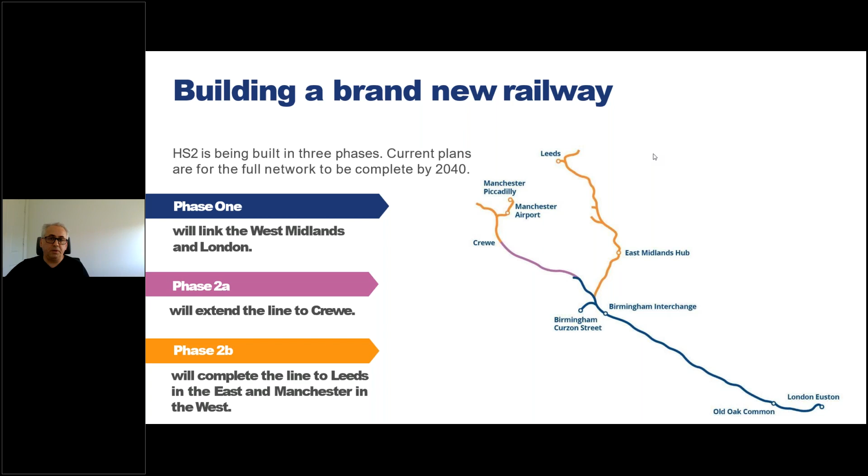So how is HS2 structured and how are we going to build it, basically? We have phase 1, which is from London Euston to Birmingham, the section which is currently undergoing civil works already, and we will go there in a minute. Then there is phase 2A, which will extend the line from Birmingham to Crewe, and phase 2B, which will complete the lines to Manchester and to Leeds on the east leg. The works are planned to be completed by 2040.

So what's the HS2 mission? We are trying to bring more capacity in terms of having more trains running, and reducing carbon. What does that mean? Bringing the traffic from our roads to the railway, and also making better connectivity between the south and the north.

A little bit about the work in progress. As I said already, we have civil contractors with boots on the ground doing works. We have a joint venture, BBV, which is Balfour Beatty and Vinci. Then we have EKFB doing works around Buckinghamshire, and we have Align doing works on the outskirts of London, things like the Chiltern Tunnel and the Colne Viaduct, which will be the longest viaduct in the UK. And we have SCS Railway, who are delivering Euston and Old Oak Common.

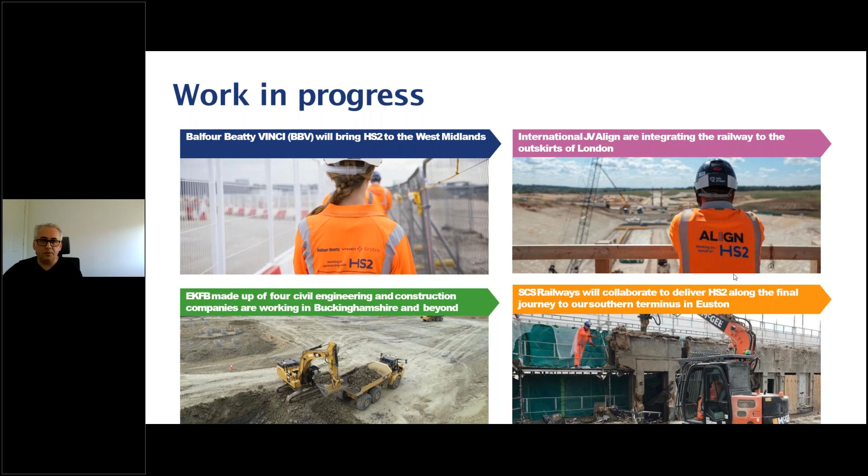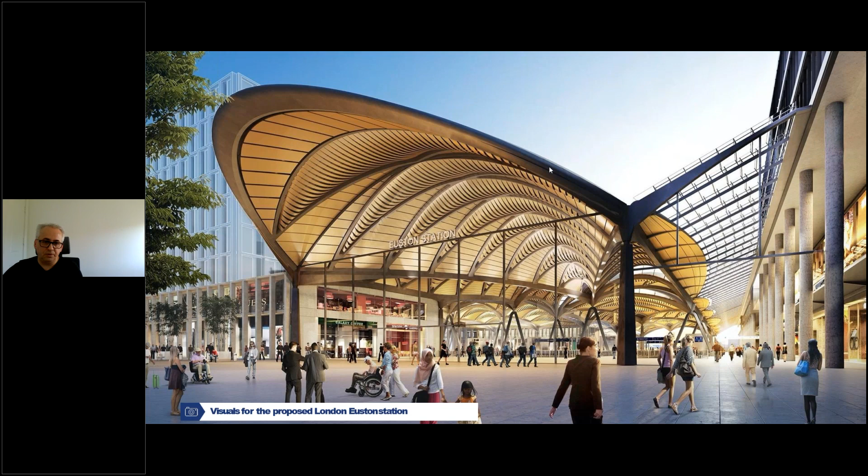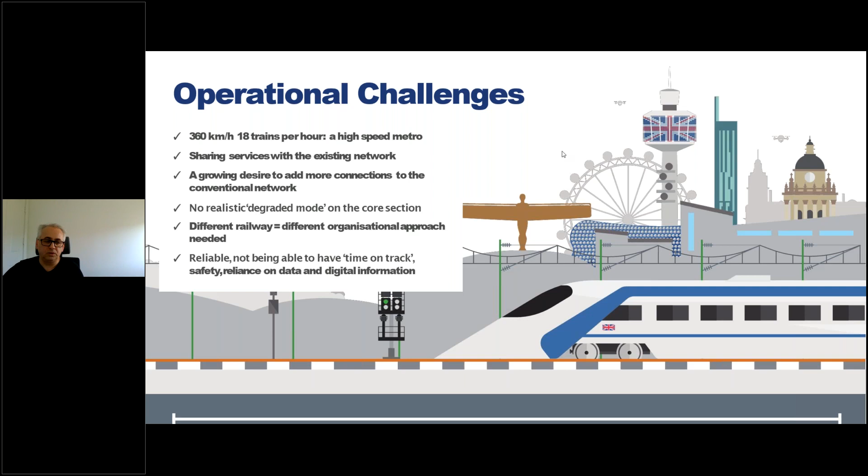What's the operational challenge? The operational speed is 360 kilometers per hour, and the plan is to have 18 trains per hour. So that sounds like a high-speed metro. It's really challenging to have a railway which is going to be reliable, available, maintainable and so on. And also, as I mentioned before, having the trains capable not only to run on the HS2 infrastructure but also on the existing infrastructure is going to be a real challenge as well.

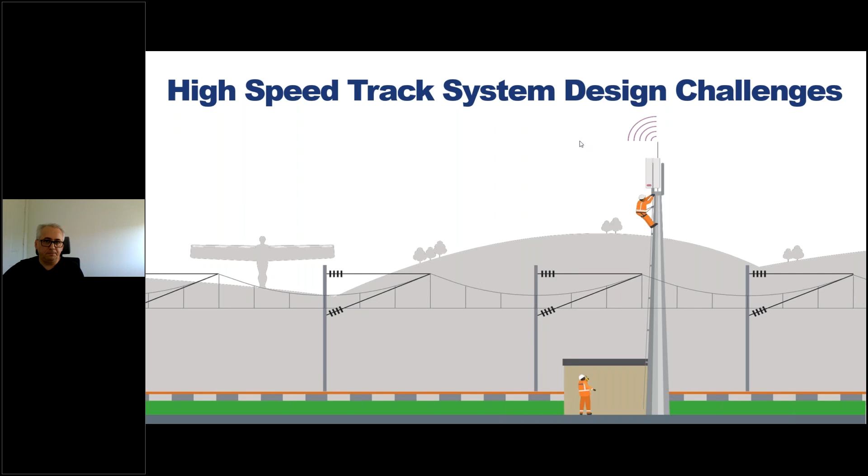So that's a little bit about the project itself. I'm going to discuss a little bit about the challenges which we in the track department are facing, how we arrived at some of the conclusions, and some of the options we considered. Obviously, at the beginning of the project we considered ballast versus slab track, and some of the main considerations when you look at the track system are listed here: cost, service life expectancy, maintenance, passenger comfort, and safety.

Safety, I'd say, is paramount, and because of the speed, the accuracy you have in your installation is paramount. So we did explore all of this, and somebody will tell me, well, slab track is obviously more expensive than ballast, which is fair enough. But slab track is not something which is very popular in Britain, I should say. So we had lots of challenges from different departments of the DfT to prove why slab track is going to be better than ballast.

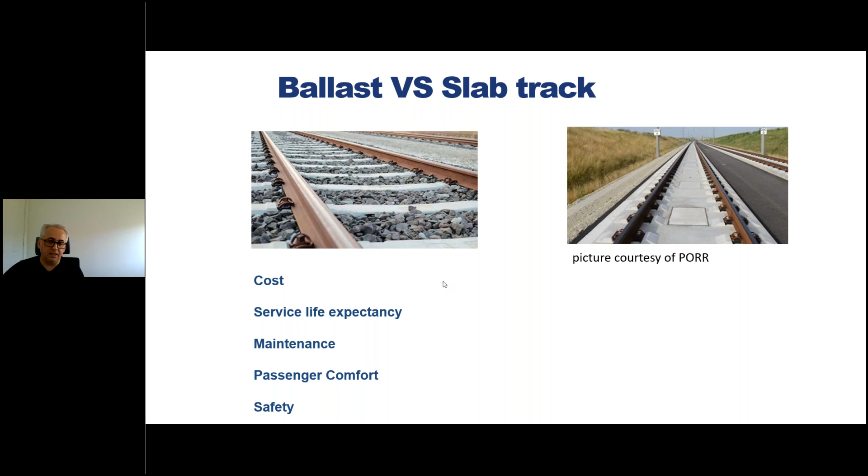Okay, so we chose the slab track, and we already have PORR, which is a little bit of an unusual contract for them. I don't know if you know, but PORR is a track slab contractor, and they are experienced on high-speed track and on metro; they are an Austrian company.

But in our contract, they will deliver only the precast slab, so the top slab. They have to design, manufacture and supply those precast slabs, and this is going to happen in the UK. They will have a factory in Somerset, close to a quarry, to tackle all the environmental issues and carbon reduction as well.

So PORR has been working closely with us for a year now, trying to develop the track system design per se, having the challenge to have different types of slab, as you can imagine, because in some areas, especially some residential areas, we will need a different slab to deal with noise and vibration.

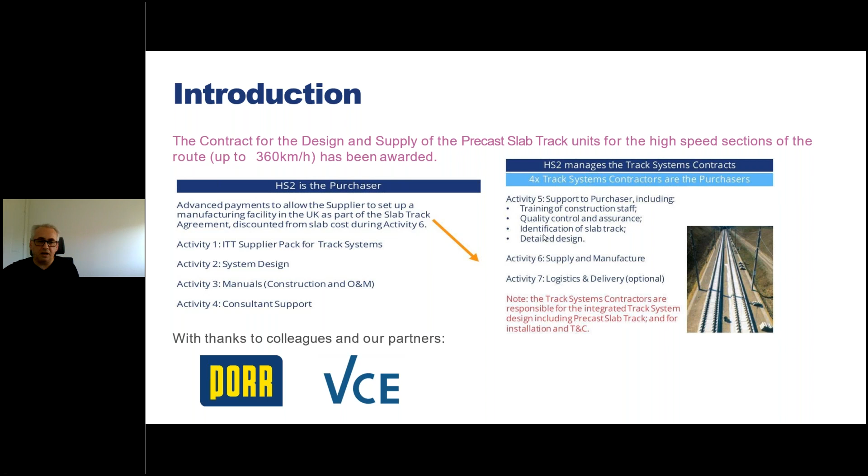I'm calling it a resilient slab, and in some areas we will have an enhanced resilient slab, I should say, which was quite challenging for us, introducing a little bit more of a floating slab track. So it might be the solution in some areas where, let's say, we have a residential building on top of tunnels, or even care homes and so on and so forth.

So looking at the trackwork packages, trackwork is part of the railway system. How we split it is track north, which is Birmingham and down. Then central, and urban, which is London basically and the outskirts of London. And then we have the track package for Phase 2A, but Phase 2A is not so advanced. The civil work didn't start yet.

So these three track packages, north, central and urban, hopefully will have a contractor by the end of this year in December. Other packages, as I mentioned before, the precast slab track. This is the PORR contract, working with us for a little bit more than a year now. Then we will have a contract for rail, which is CEN60 rail. We are negotiating as well. And another contract would be the switch and crossing contract.

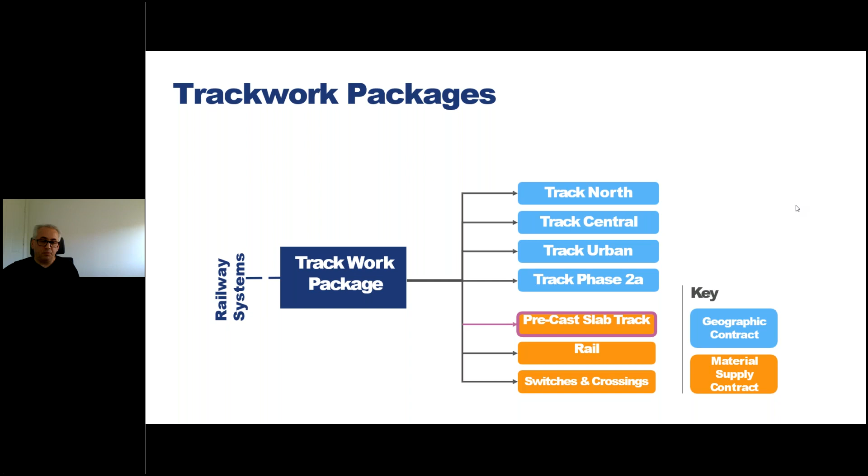That's interesting, because we are having lots of challenges with choosing the geometry, because of the civil footprint, as you can imagine. So these are the contracts. A little bit about contract quantities now. As I mentioned, these are the Phase One contracts which are now live. So we have the route, as I said, which is Phase One.

You can have a look here at the amount of work we need to deliver only in Phase One: 80 kilometers of embankment, and cutting, I guess, 60 kilometers, 15 kilometers of viaducts, and so on and so forth. The total tunnels will be 39.4 kilometers. Chiltern alone is 16, and this is standard bored tunnel, and then we have the cut and cover tunnels, which are a little bit shorter, but still 13.4 kilometers.

And then switch and crossing, we have 170 units for Phase One and Phase 2A, and the rail expansion devices, we have 75 units along the route on Phase One and Phase 2A as well.

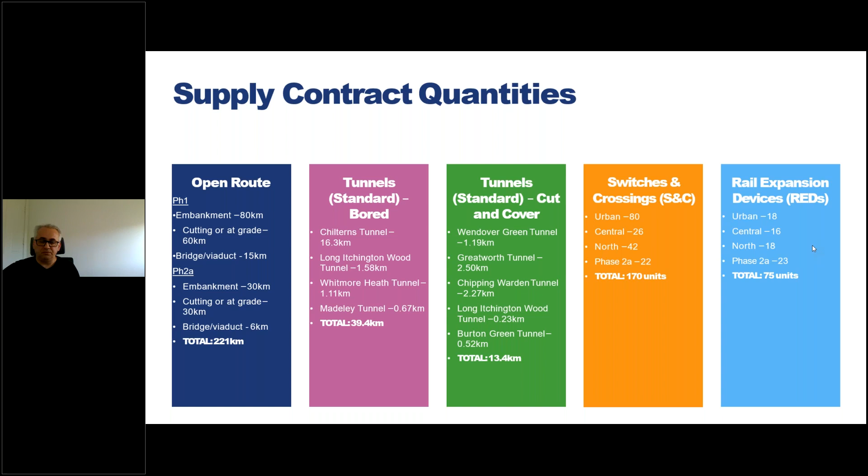One more thing which I wanted to mention: under the S&C we will have different types of slab track, but that's not in the scope of PRE, because, as you can imagine, we have what I call high-speed S&Cs with swing noses, and only for that area HS2 is mandating precast slab track. But the track contractor will choose the precast on his own, because, as I said, it's not included in the PRE scope.

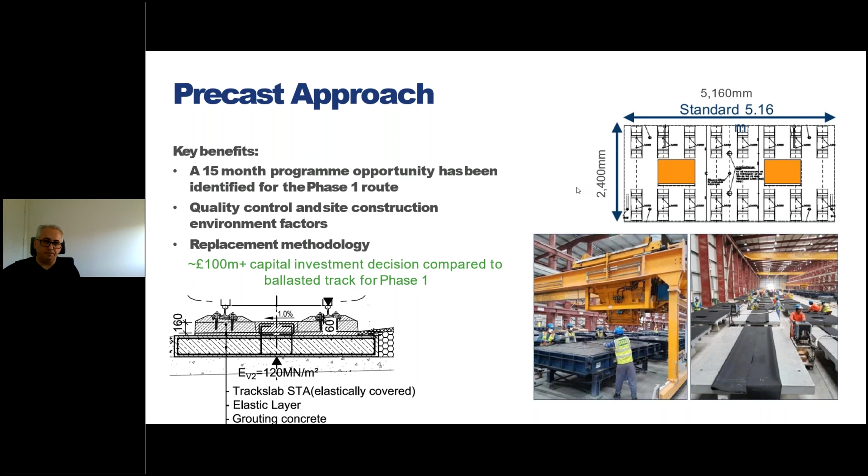And another S&C, what I'm calling conventional S&C for lower speeds, might be cast in situ or other options, or precast. So we are not mandating those, because that's something the track contractor we are expecting to bring in and price for.

So I mentioned briefly, this is how it's going to look like. All the pictures, I have to mention, are courtesy of PORR, so they allow me to use them. As I said, the bottom picture here with the precast is from another job. This job is from Doha, so they have a facility similar to what they are going to build in Somerset, and they are making provision, and they will start to do that later on in the program.

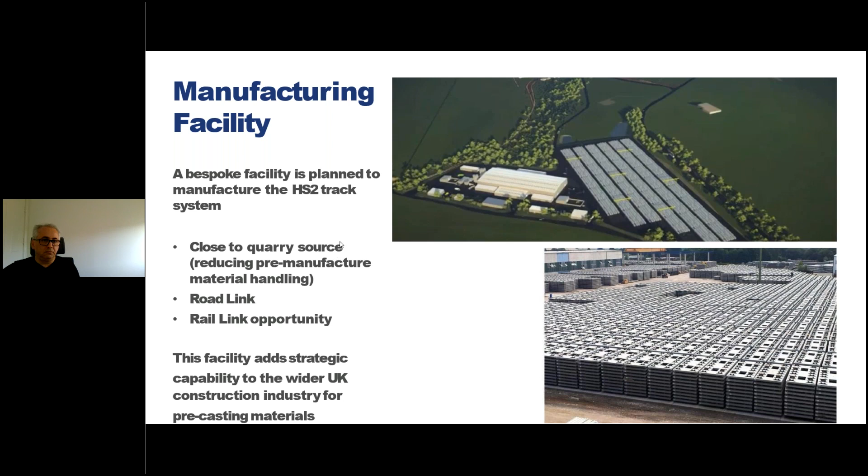But once it's installed, a slab track needs to stay for at least 60 years, with very little maintenance apart from fastening and rail checking and so on. So the slabs are designed and built to last that long. So when you put that in the equation, the cost which you calculate for ballast and slab, you can say it's nearly square.

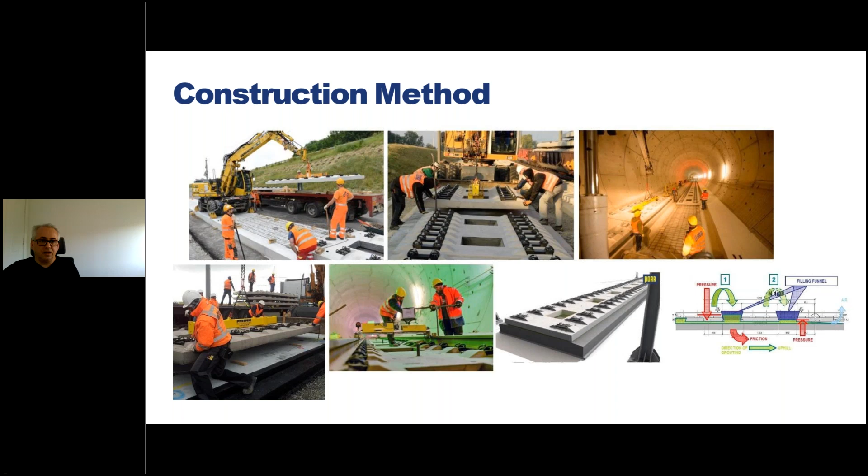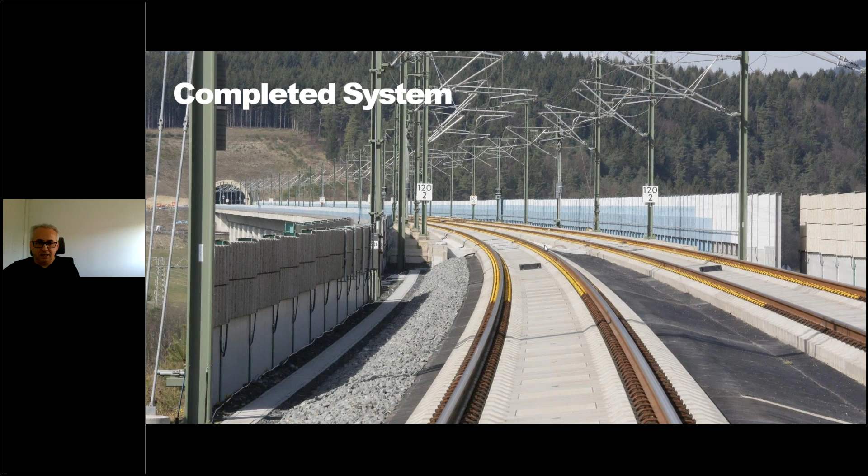This is how a complete system, PRE system, looks like. This is from another project, obviously not in the UK. They didn't do any high speed in the UK. So this is how the final work will look.

Going back to some of the challenges again, track design challenges. So we have track alignment and track quality, very important, as speed and passenger comfort are key. And then earthworks interaction: we have the challenge with settlements, and when you have a slab track you almost have to have settlement-free earthworks. Of course, that's not possible everywhere, but as long as the settlements are uniform and long, it's not an issue. Differential settlements, I should say, are something which is not acceptable, especially for a high-speed railway.

Other challenges, as I mentioned, sound, noise, and vibration, especially ground-borne noise, and I will talk about it later on. And also integration with structures, bridges especially, and also tunnels, because you have an interface with those as well.

Track alignment and track quality: obviously, the tolerances when it's about high speed, it's very important to have almost perfect alignment, I should say, and installation and monitoring of those. It's very important. And again, achieving an alignment which is capable of running a 360 kilometers per hour train, in terms of parameters like rate of change of cant and deficiency and so on, are key elements.

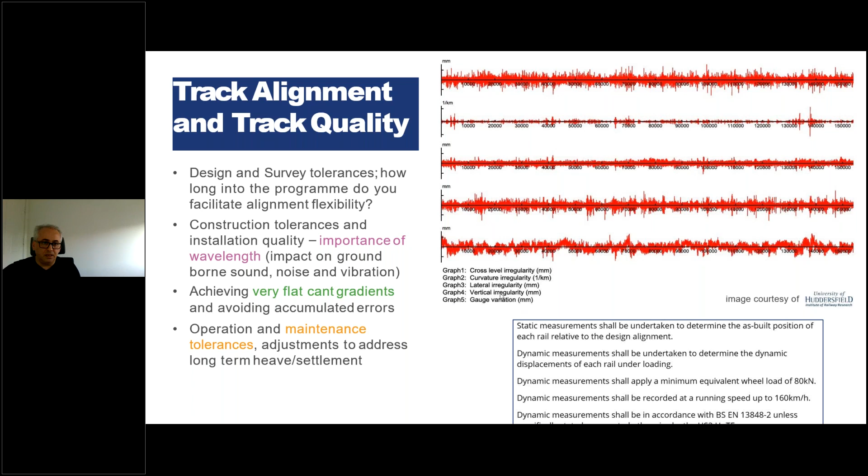So in terms of survey, I mentioned that because HS2 is using what is called snake grid. I think Network Rail has got something similar. The snake grid is a very powerful tool because of the accuracy and the precise integration of the design.

So for example, if you use the normal Ordnance Survey, you will have a 60-meter difference between the snake grid and the Ordnance Survey. So that's quite a lot. So having something like snake grid, which is like measuring a flat surface rather than an arc, was very important for us to have implemented.

And the survey team is part of my team, the track team. So I'm working closely, as you can imagine, with other railway systems to implement the survey requirements as well.

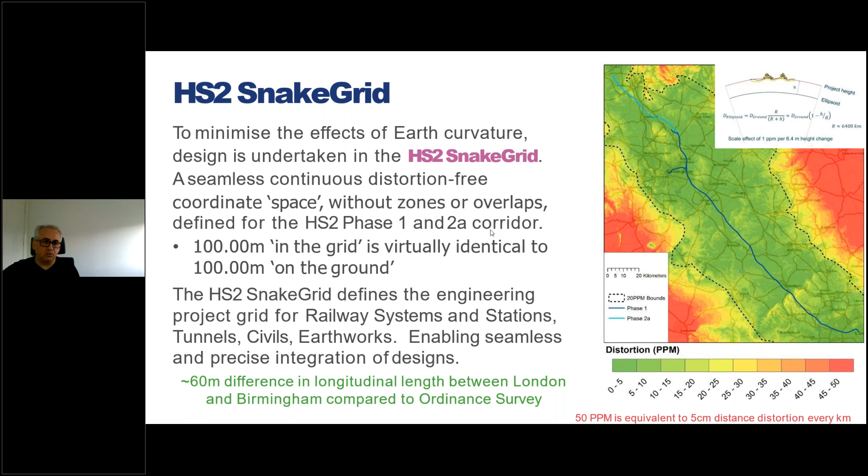Earthwork interaction, as I mentioned before. When you have a slab track installation, it's so critical when you are going to start to install the slab, and what kind of settlements you are going to have, or heights you are going to have there, and so on and so forth. Because once you install the track, if you have a ballast track, well, we can go there and tamp, and we may fix the alignment.

That's not quite the same with the slab track, because we need to make sure at the handover, when the civils hand over, the track is ready to be laid, and also continuously monitor to see if the empirical mathematics are proven, and actually we don't face any issue with the track installation.

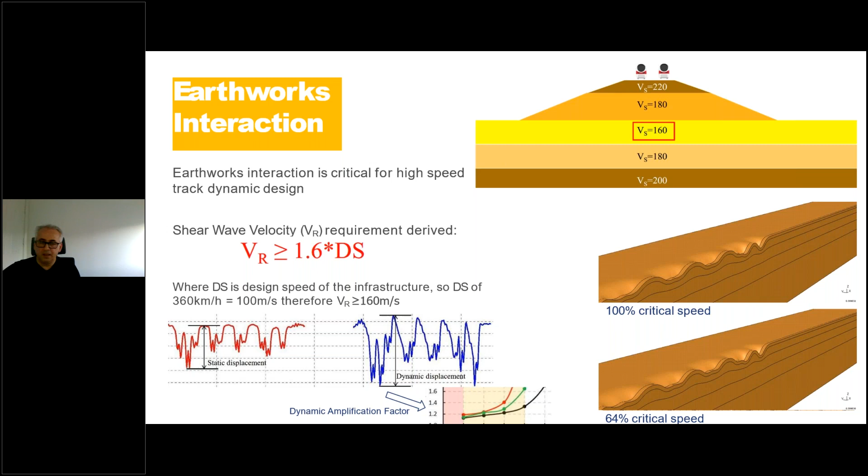On the earthwork interaction, the settlements, as I said, are very, very critical. Normally your earthworks have to be almost settlement free. But in our standards now we allow for a 30 millimeters maximum over the 60 year period, and those settlements should happen continuously on a long stretch of rail, not having differential settlement and so on and so forth.

Because having earthworks which are settlement free will include a lot of piling and extra cost, as you can imagine. So we need to go above and beyond in order to make sure what we are allowing in terms of settlements is manageable in terms of operation and maintenance and so on.

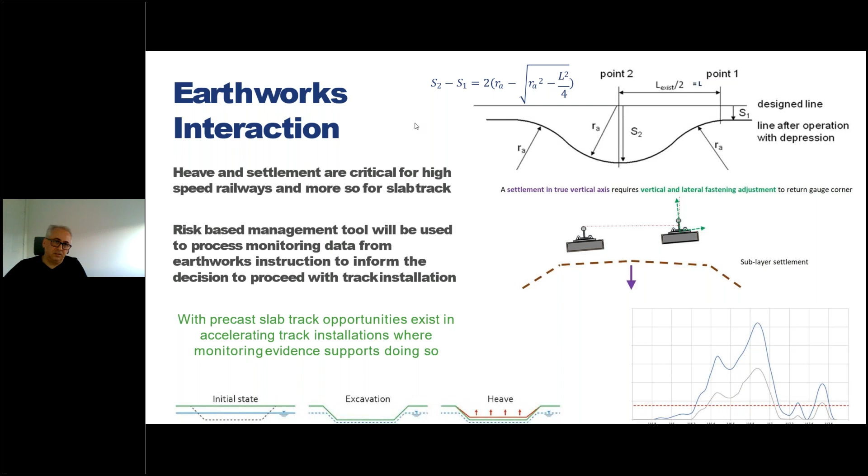Another issue is heave, because sometimes, because of the nature of the earth there, you can have heaves, not settlements. That's another big issue because that can break, and you can have bumps and problems with your fastenings and so on and so forth.

Sound, noise, and vibration. That's really very critical, and I was involved very heavily in lots of models which we worked on together with our contractor, PORR, in order to develop a solution for groundborne noise. You have the airborne noise, where there's not much you can do, but when it's about noise in the tunnel, the first thing people ask is what the track can do.

Luckily, we could explore with PORR, and we found a solution which you may know from metro or tram solutions, which is called floating slab. It's a slab with springs underneath, which allows the slab to move together with the train, and that deals with the groundborne noise in those areas.

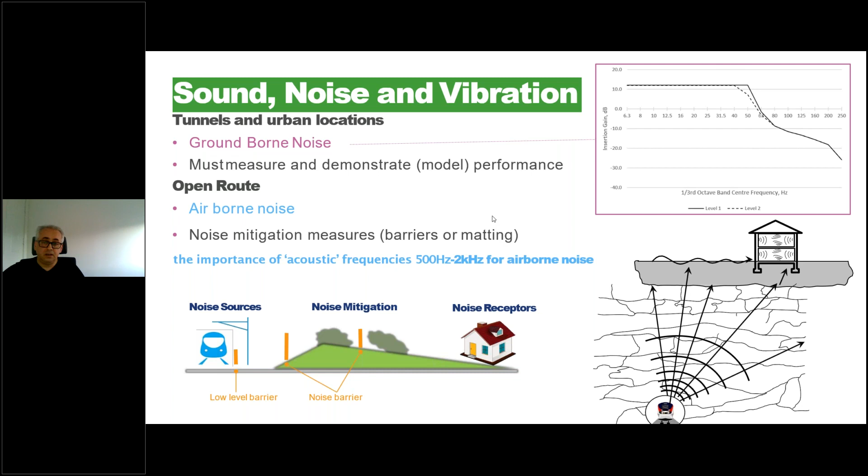So lots of challenges, just to find a solution, because the requirements are very high in terms of groundborne noise and vibration, especially in residential areas, or, as I said, in some areas we have nursing homes and so on and so forth.

Another issue is integration with structures. Once you have slab track on top of a bridge, one of the major issues is how you integrate that slab with the bridge, and our civil partners came with lots of skew bridges which are really challenging. But having PORR and their designer on board, we managed to find a solution for each challenging bridge, which proved very successful.

But again, the limits of the viaducts, how the forces are dissipated, where to install rail expansion devices if necessary, and so on. Because having a continuous long structure, somehow you need to allow for movement, and the only way is to install rail expansion devices.

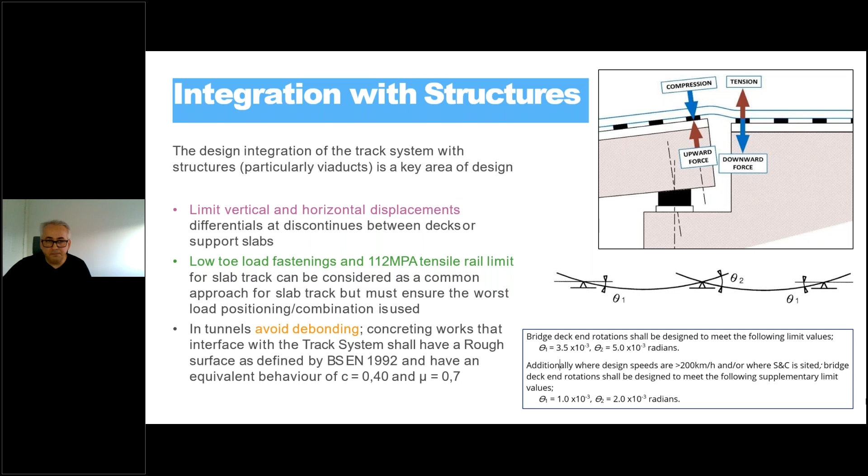We've got the first question in from Paul Ebbert. He says, what are the tolerances for the sub-slab top and line to support the PORR units?

We allow sometimes, because of the drainage interfaces or in the station, a solution for 500 as a minimum, but that's only approved because we have places like Old Oak Common, where we have areas which have voids and so on, and they have a big problem with the drainage, so we have to come down from 700 to 500 in those areas. And that's to include the precast and the HBL and CBL layers.